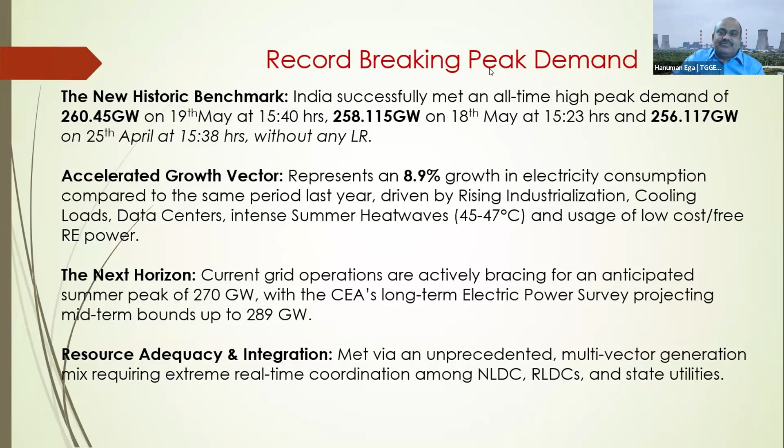So next, as I have said, we have to get ready to meet 270 gigawatts. It seems it is going to 289 also as per one extrapolation. Now if you see how things are moving among thermal, solar, hydro, nuclear, gas, wind, storage, whenever the demand is peaking, the conventional fossil generation is coming down. It is to be flexibilized since the RE green generation is to be used much.

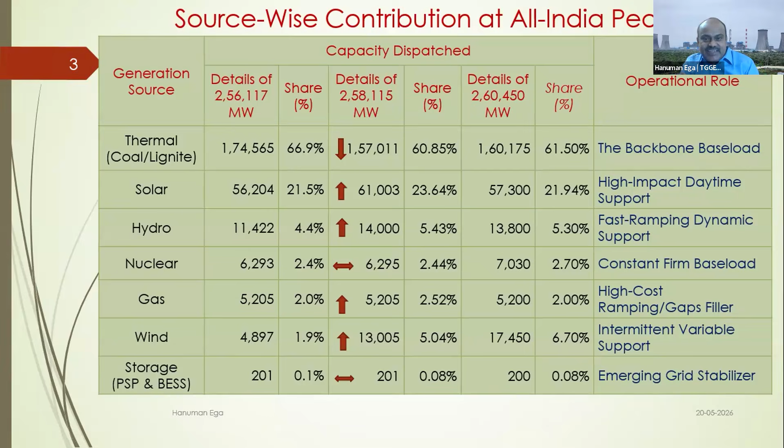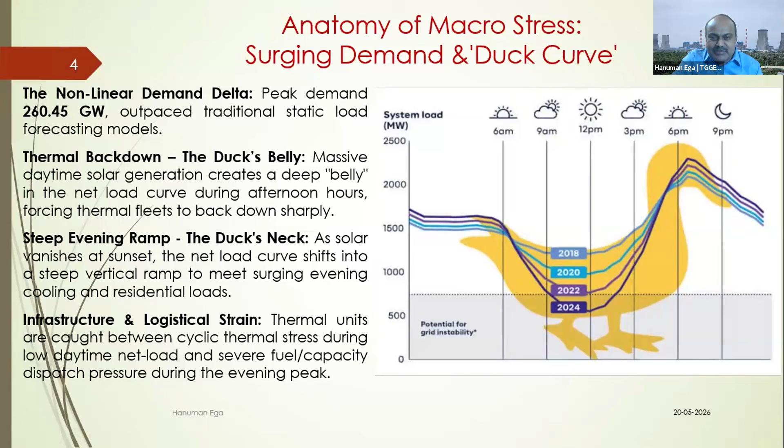If you see the three happenings, the April peak, the peak on 18th and the peak on 19th, the solar percentage is high. This can be explained using a duck curve. This is the duck curve; most of you are aware of it. When non-linear demand is happening, take the demand curve, a day demand curve from 0 hours to 24 hours. Solar generation is a bell-shaped curve, and our fossil fuel generation demand curve is almost a bucket curve or tub curve.

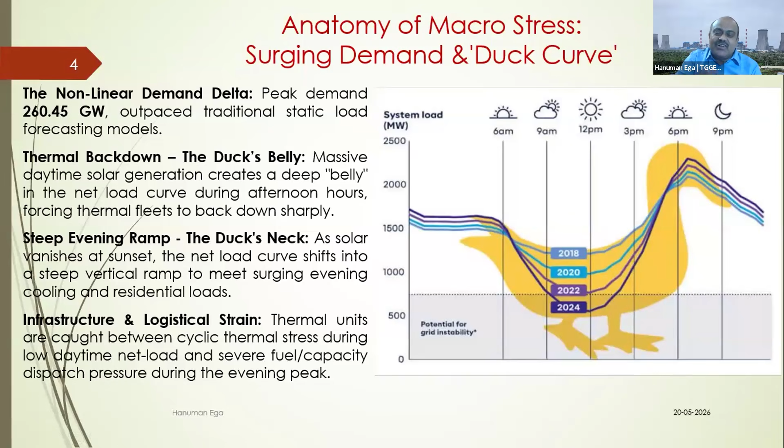As the solar generation is picking up, grid operators, that is SLDC, have to back down the generation further. That's how a duck belly is forming. But after sunset, the solar comes down from the peak to almost zero around 6:30. From that time onwards, the real stress on the thermal generation starts. That's how the duck neck and head go up like this. That is the main stress point on thermal generation, and we have to manage this. How flexibilization attains this duck curve non-linear demand pattern, and what we have to do as far as thermal generation is concerned, let me explain.

Because of this flexibilization, as per the instructions of CEA, previously, as said by Mr. Sanjeev, it used to be 80 to 90% PLF. But nowadays we are not able to maintain more than 55 to 60 plant load factor. So government has given a mandate to flexibilize the thermal units to 55%, then to deep flexibilization of 40%. Not only reducing the load to 40% of TML, the ramp rate also should be followed as given by the CEA mandate: 3% from 100 to 75 and 75 to 55, 2%, and 1% from 55 to 40. This ramp rate is the most dangerous as far as thermal plants are concerned.

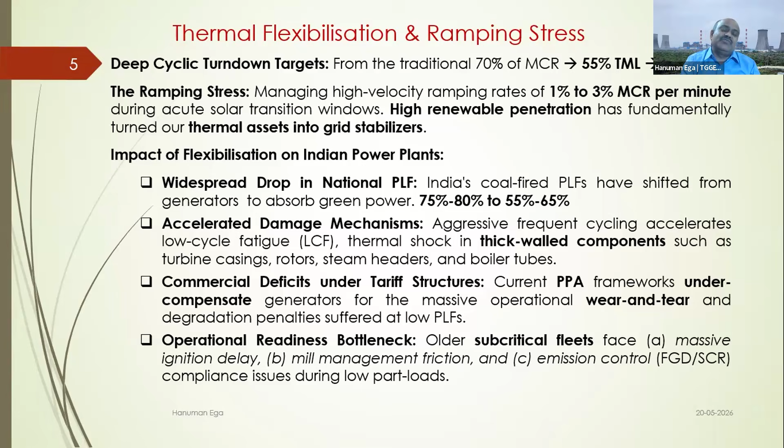Let me recollect the incident that happened recently at a Chhattisgarh thermal power station, where 45 people have died. At that station, some fan problem was there. They took the second lube oil pump of the PA fan, and tried to raise the load as per the instruction of the SLDC. The ramp rate was as per the mandate of the CEA. Since it is most dangerous at that point, because of the accumulation of coal powder inside the furnace, it exploded. These sorts of happenings may happen in future. We should not expect such dangerous things, but they may happen. These are the things to be addressed whenever flexibilization is implemented in thermal.

So what is the experience of India with thermal plant flexibilization? During reducing and raising the load, because of these frequent changes, we are experiencing fluctuation in steam temperatures and high drum level swings. The operator is unable to control and maintain the drum level, so high drum level swings are there. Flame disturbance in the furnace is happening.

Furnace pressurization is also an issue; many times our units have tripped on furnace pressure variation. That is happening whenever load is being reduced to 45% or 50% as per the demand of SLDC. Next, one more thing, whenever we come back to 40 to 45%, the primary air requirement will be less. So at that time, primary air fans may stall or desynchronize.

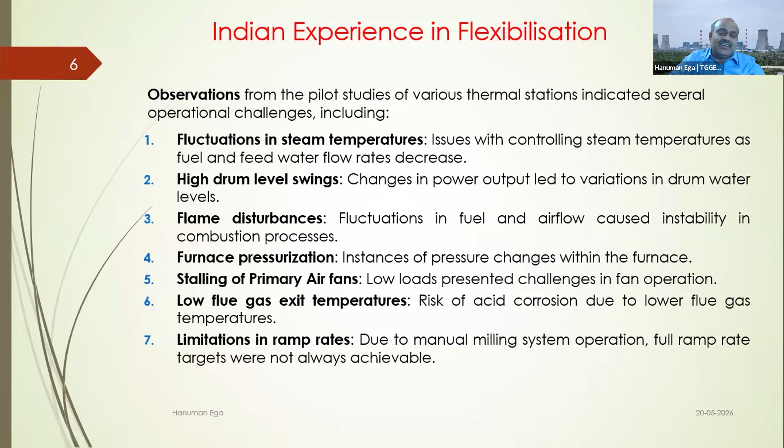Since the PA fans are running in a synchronized mode at 900 mm water column pressure, if we reduce the fuel injection into the boiler, these PA fans may deparallelize and may stall, and the unit will be tripped. So that is one of the important problems thermal plants are facing. And low flue gas exit temperatures, and ramp rates: we are not able to maintain the ramp rate. We are sometimes able to maintain 55% and 40% in supercritical units, but the ramp rate is just highly impossible for any thermal power plant.

So let us go through the global experience. It is very important to mention here that Germany has successfully converted all its coal and lignite fleets to flexibilize up to 20 to 25% of technical minimum load, with 4% ramp rate. We are unable to maintain even 3%, but they have succeeded with 4% by successfully bypassing the water wall system. This is one of the most important points to be noted by the OEMs of the Indian power sector. They are able to bypass the radiation zone, where 40 to 55% of the thermal energy transmits.

They are able to bypass it, and they use automated combustion tuning and low load coal mills by implementing classifiers up to 100%, so that they can pulverize the coal much finer, and dedicated condensate throttling. These are the important things Germany and Finland have implemented. The beauty of Germany is every house has a rooftop solar generator. So every consumer is a prosumer there. That's how they are able to maintain it.

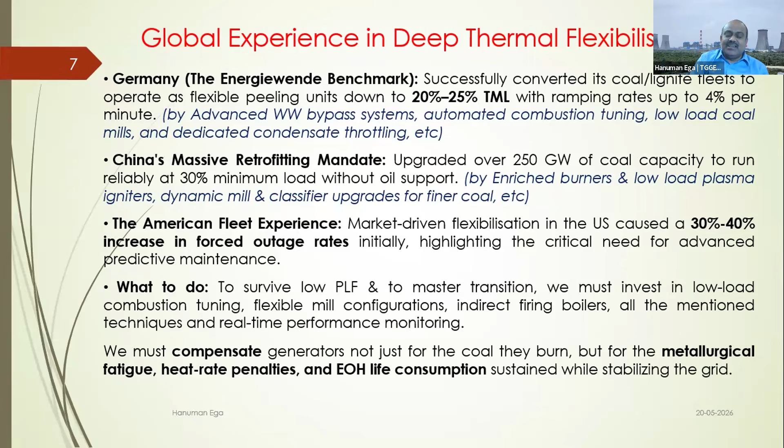Take the case of Osaka generators. They are implementing, I think, 2 into 350 megawatts at Osaka super thermal power station. We have to implement such type of technology also. Our supercritical technologies start from 660 megawatts. We have to implement it with lower capacity units also. That is one more point I wish to impress upon you here.

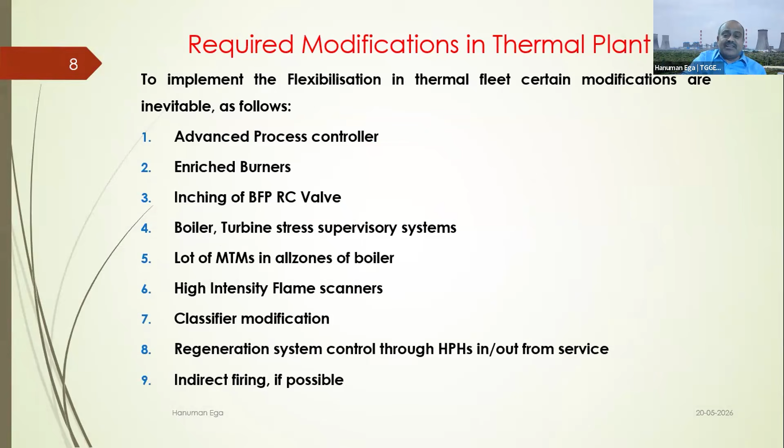Next, what are the required modifications? As I have discussed, these are advanced process control, enriched burners, an inching recirculation valve in the discharge of the BFP, and supervisory systems for stress of the boiler and turbine. A lot of metal temperature measurement TCs have to be installed. Such things we have to implement.

Next, what happens if we take up these flexibilization measures in a unit? There will be two types of expenditures, CapEx and OpEx. CapEx may take 20 to 50 crores per unit. Operational expenditure will happen because of increase in station heat rate, increase in O&M expenditure due to equipment deterioration because of frequent low cycle constraints, and cost may increase because of oil consumption.

Oil consumption will increase because of two factors. Whenever the unit is at 40 or 45%, if any disturbance comes, the unit will certainly trip. To avoid that, the operator has to cut in the oil. This is the first point. Second, the number of unit trips will certainly increase when the load is maintained at 40%. Because of these two points, the specific oil consumption will rise. As per a rough calculation, variable cost may rise by 25 paise per kilowatt because of increase in station heat rate, and O&M cost may increase it by 10 paise per kilowatt.

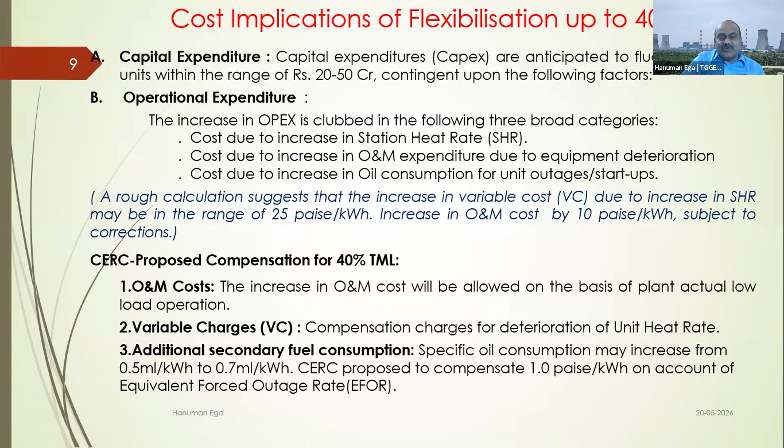These two things I have collected from some calculations. These two things are subject to correction. So next, how a unit performs if we flexibilize it to 55% and flexibilize to 40%.

Turbine heat rate: if we go to 40% flexibilization, that is 40% of TML, station heat rate increased by 10 to 14%. And auxiliary power consumption, as we are already experiencing, is raised by 10 to 11%. And these are some of the other parameters. If you can see, boiler hydrodynamics will change, flame stability will be lost, and boiler tube failures will increase. And as I have just explained, tariff will also increase by 20%. Life will be reduced by 10 years.

If we continuously flexibilize the unit up to 40%, we are experiencing 2 to 3 times in a day going back to 40% and going back to full load. Because in Telangana, our daily load curve will have 2 peaks, morning peak and evening peak. Among these 2 peaks, the morning peak happens at 8 a.m., which is the peakest of these two because of the agricultural demand. So at that time, since the solar is not there, we have to maintain full load.

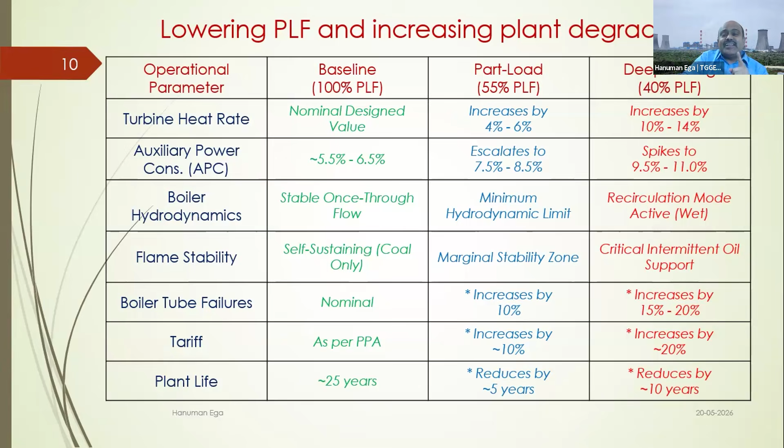And then at midday, we have to come back to 40%. And evening, we have to raise to full load. And after 10, 11 p.m., we have to come back to the minimum load, 40 or 55% as per the demand. So like that, every thermal unit is facing almost 2 to 3 cycles, which certainly reduces the life by 10 to 15 years.

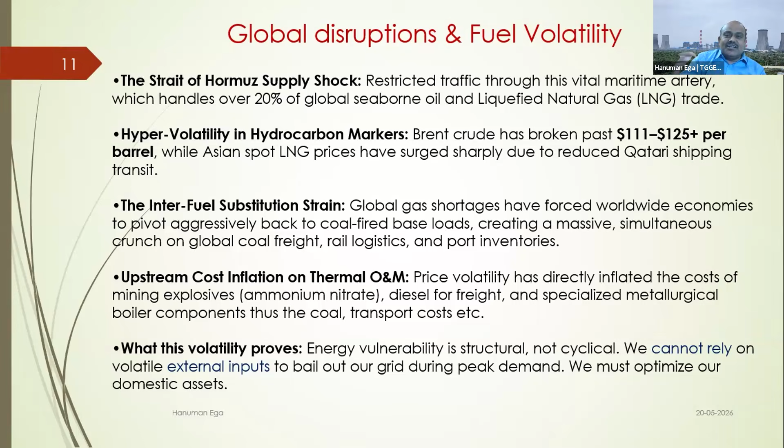So apart from these stresses on the thermal power plant, another new stress is because of global disruptions in the Middle East, the Strait of Hormuz supply shock. LNG is going to reduce to India by 20% in the coming days. And what is the relation between this LNG and electricity? I'll explain. These things will certainly push the consumer to switch over to electricity. This is what is called deep electrification, as defined by the Niti Aayog in their paper, Viksit Bharat Scenarios, Viksit Bharat and Net Zero.

They have proposed deep electrification, especially in 3 areas, which they have termed 3 pillars. Pillar A, transport, the mobility revolution. By 2035 or 2040, every vehicle should be an electric vehicle. So with that, a huge electricity demand will be there. Pillar B is industry. This is very hard to abate, but industry also has to come onto the electricity grid instead of diesel, petrol, or any other fossil fuels.

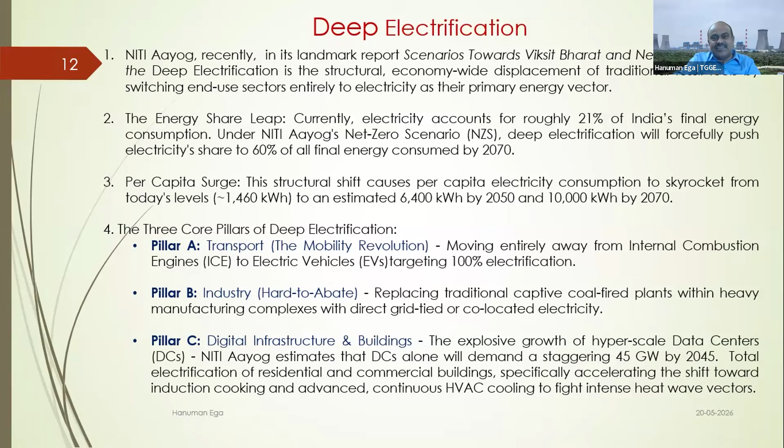And pillar C is digital infrastructure and buildings. Everything except 10 to 15% of energy should be transitioned to electric power. So with that deep electrification, we may have to face very, very huge strain on the thermal power plants. Now, what is the way forward? We have to maintain the plant with proper predictive maintenance. Even nowadays, we are maintaining the plant with proper prediction, but AI-driven analytics is not yet available.

The present requirement is huge digitalization, and AI-driven analytics should be implemented to predict boiler tube leakages, turbine, fans, and pump failures in advance so that they can be avoided. Next is combustion optimization, deep flexibilization, energy storage. This is one of the important points. By 2035, our installed capacity should be 3 times the present-day capacity, so almost 1300 gigawatts. In that 1300 gigawatts, we should have at least 20% of BESS, battery energy storage system, or PSP.

Among these two, BESS and PSP, the Government of India CEA is saying 6 years, but as per practical experience, to commission a PSP from zero date, meaning the point of having the idea of putting up a PSP, it will certainly take 10 years, whereas BESS will take 12 to 14 months. So BESS is the immediate solution.

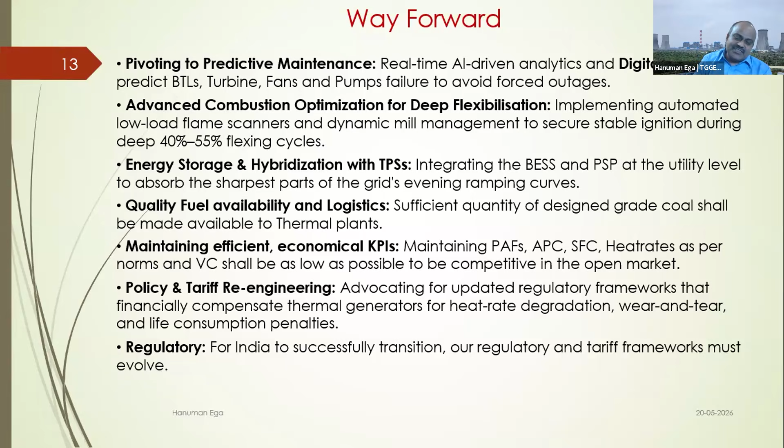One more thing is the regulatory side. Regulation is available. CERC has come out with one mechanism to compensate the thermal power generator, but that is not sufficient. So now the generators are approaching ERCs to compensate as per the actuals. So these things are to be taken care of to take care of the thermal power generators.